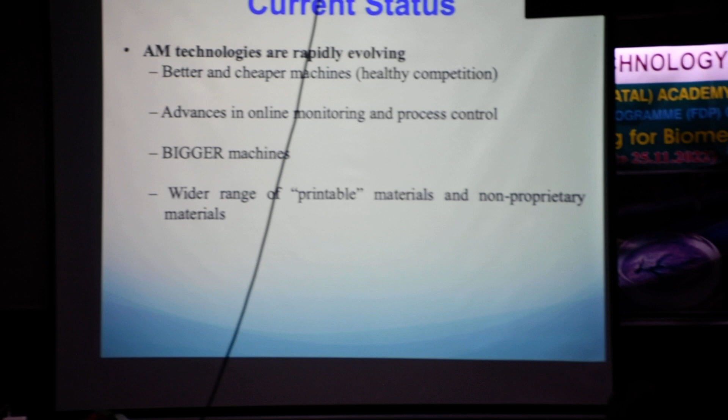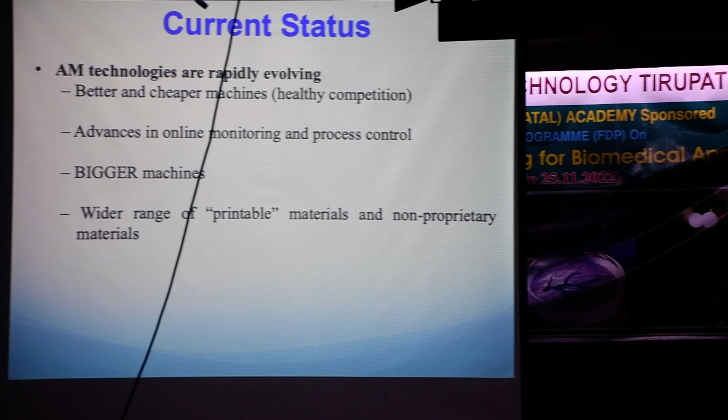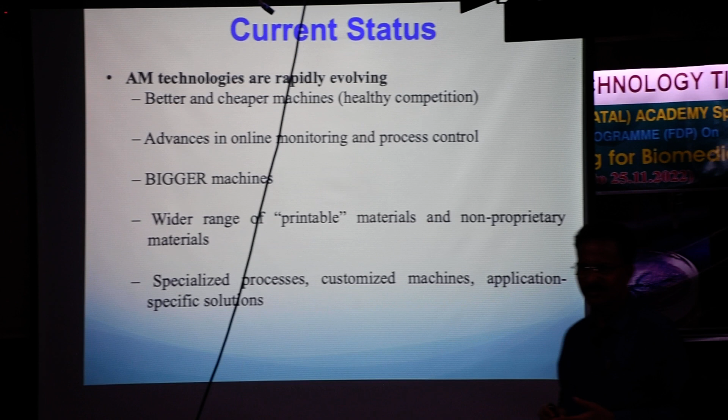Wide range of printable materials and non-proprietary materials, that is what I was talking about. The material should not be proprietary. You should have multiple sources to source the materials so that you will get the material at a cheaper rate, of course maintaining the quality. So printable materials also, wide range of materials you should be able to print. If your technology says I can only print plastics, it has limitations. Your technology should be able to print metals, plastics, ceramics, even biomaterial, that is what your workshop is. Biomaterials, biocompatible materials, this piece.

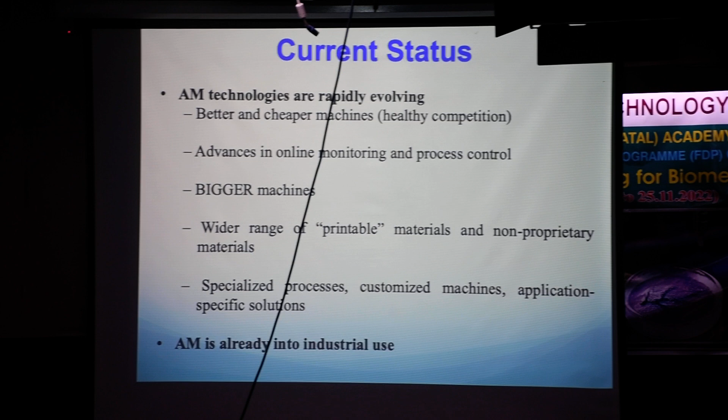So the specialized processes, customized machines, application specific solutions, these are all part of the current status of additive manufacturing. Additive manufacturing is no more a rapid prototyping technique, it has gone into the industry already. People are using it now in the industry to some limited extent, not for everything.

So unique benefits or capabilities of 3D printing, we can list as follows. It is very rapid, in few hours an idea can be realized and converted into physical reality. What you see is what you build, even what you don't see, what you conceptualize in the mind, you will be able to produce it. There is no limitation as such.

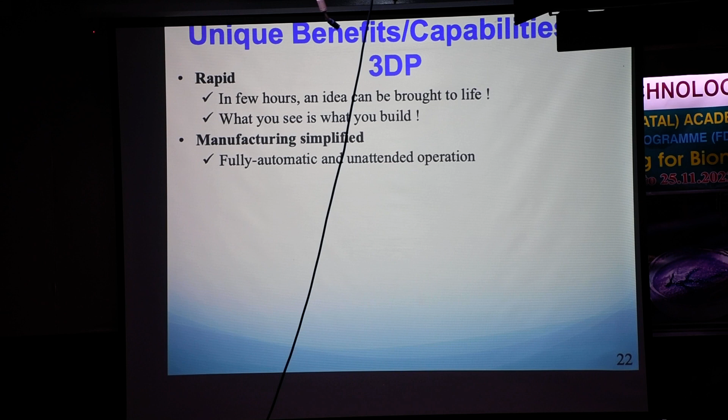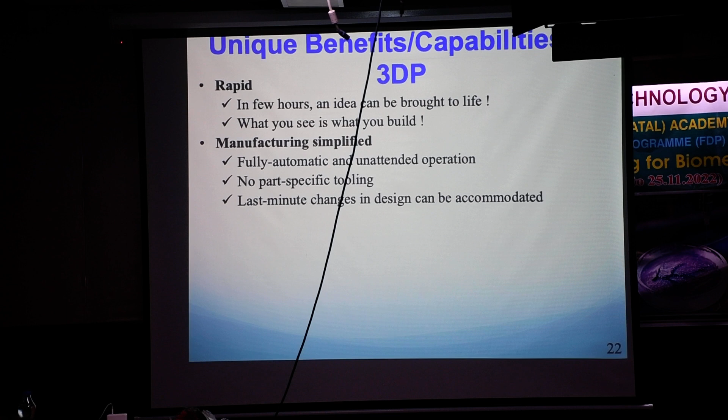Manufacturing simplified: fully automated and unattended operations. Operator need not be there, he can just switch on the machine, load the material, switch it on. Come tomorrow morning, the component will be ready. No part specific tooling, any component, same machine you can use. Last minute changes very easily can be accommodated.

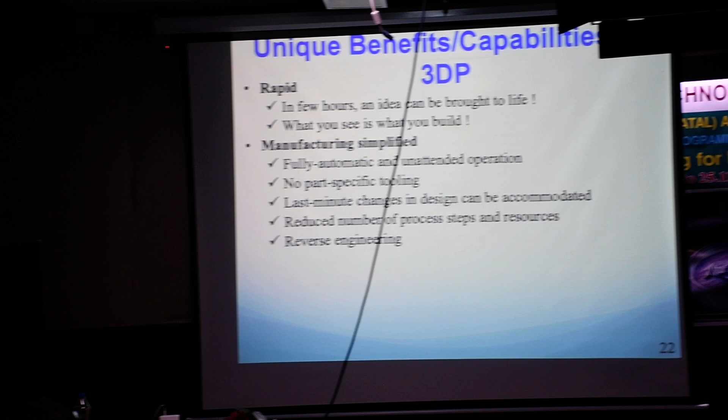Reduced number of process steps and resources. There are only three things: build the solid model, slice it, and then print it. That's all, 3 steps. Reverse engineering is also very much possible.

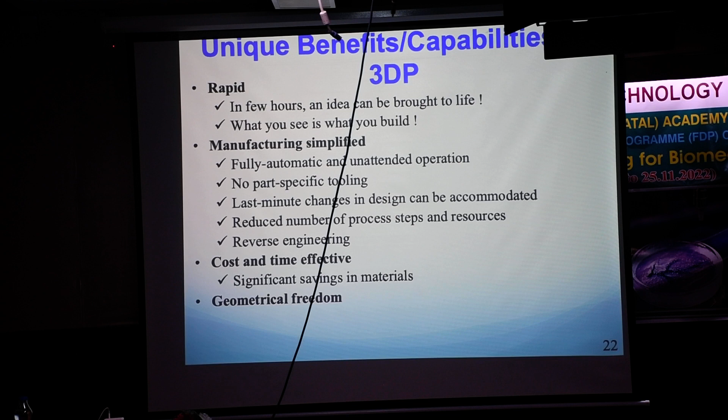Cost effective and time effective. Significant savings in the materials, because material wastage is very minimal in this case. Support material is what you are going to take out, otherwise you will be depositing whatever is necessary to realize the component.

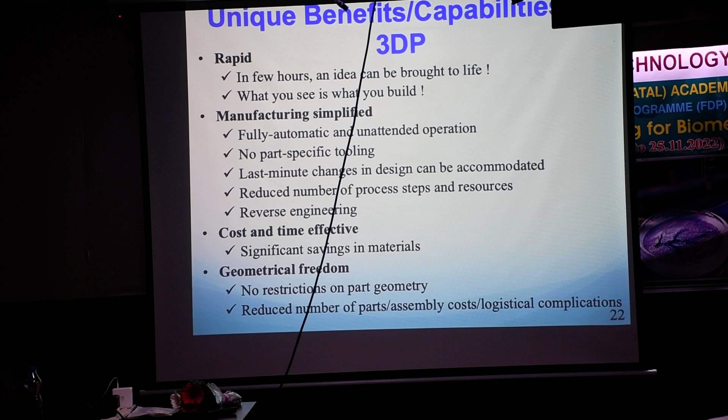Geometrical freedom, you have no restriction on the part geometry. In fact we say in 3D printing the part complexity is free. You don't have to worry about the complexity in the 3D printing process.

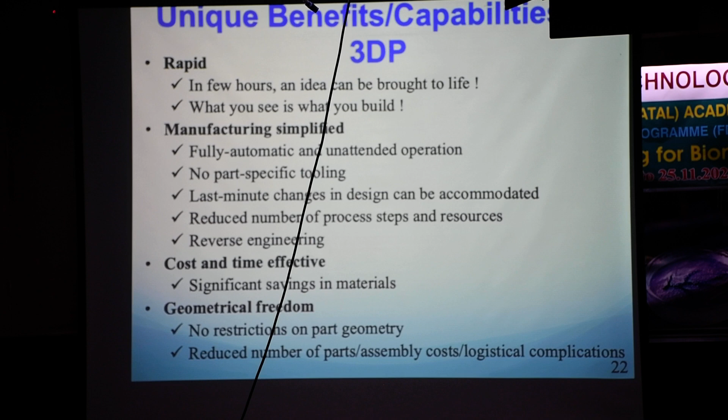Reduce the number of parts, assembly costs, and logistical complications. In fact you have a product in which various components will be having relative motion. In the conventional scenario, how will you think of it? Fabrication, you produce different components, bring them together, assemble them, and realize the product. In 3D printing you can build the entire thing, all the components with relative motion in one go. No assembly required, that is the beauty of this particular technology.

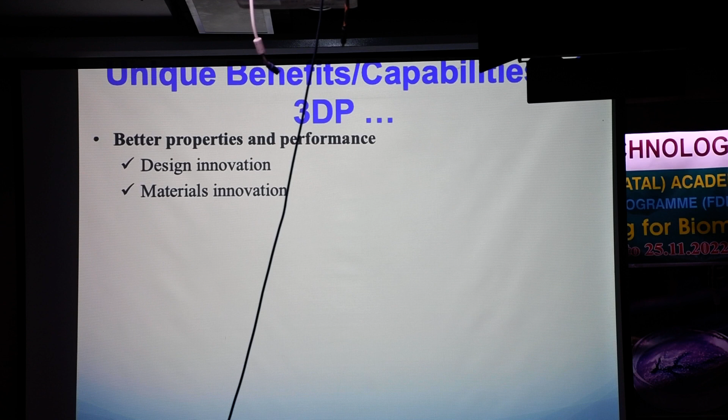So the better properties and performance you can achieve with the components. Design innovation: you can design how much material is required in this particular section of the component, what sort of design changes are required. All those things you can do as far as design is concerned.

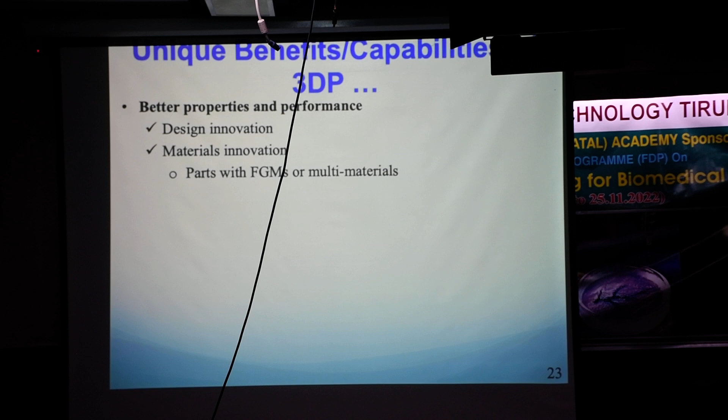As far as materials innovation is concerned, you can produce parts with functionally graded materials or multi-materials. A single component may have different materials at different locations, multi-material. Or you can have material A at 100% here, material B at 100% here, and material B slowly diminishing while material A slowly increases like this. So you may achieve this kind of gradients. If you feel some property is required at this end, you use a corresponding material with a different property altogether.

For example, in the case of an aircraft body: inside you have some conditions, outside you have altogether extreme or very harsh conditions, especially in the case of rocket materials. Outside the material will be experiencing a lot of temperature, friction, all those things. Inside its conditions are different. So from outside to inside you need to have that gradient. Such things we call functionally graded materials.

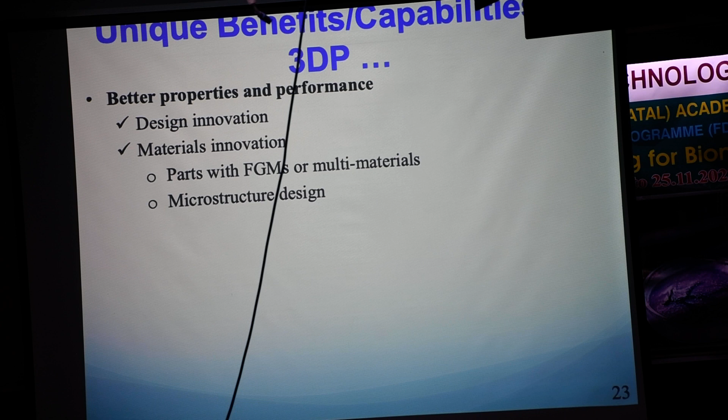Microstructural design: not only just using the material, but what kind of microstructure is required at which region. So you can design the microstructure also to that extent, that is possible.

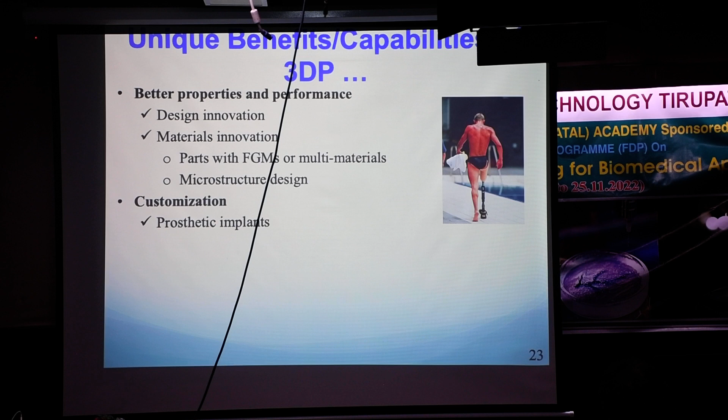Customization, because when we talk about body parts, different people will have different dimensions. For example, the knee joint has different dimensions and slight geometric variations. So you can produce prosthetic implants suited to a particular patient.

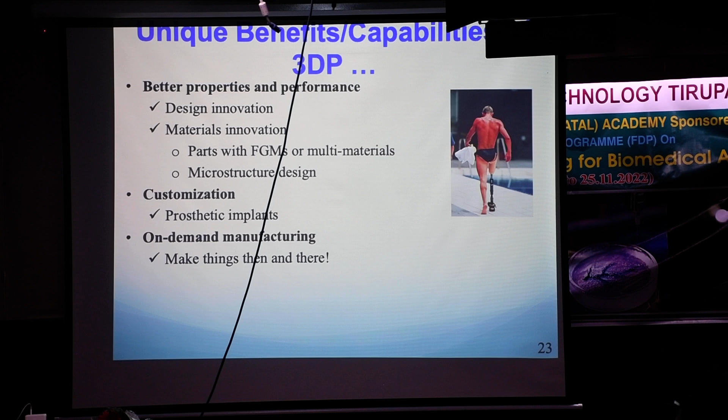Next, on-demand manufacturing, making things then and there. For example, when the Mars Rover 2020 was launched and sent, a 3D printer was part of it, because if something goes wrong, the 3D printer has to manufacture and use a part, since nobody is there on Mars. So your 3D printer helps in manufacturing or repairing a particular component.

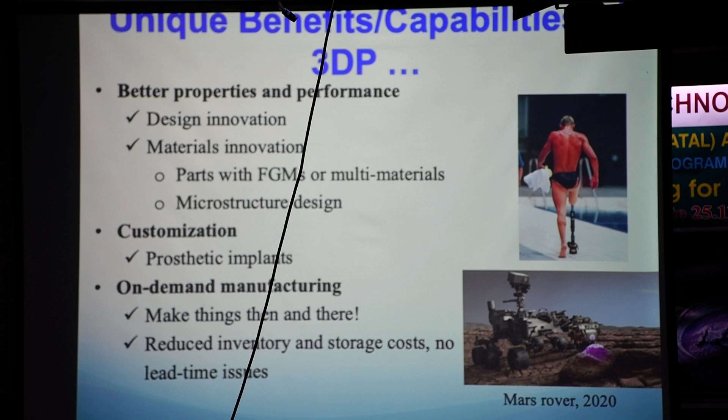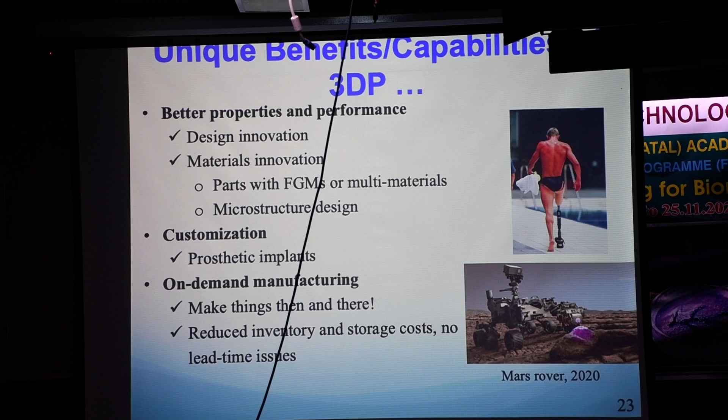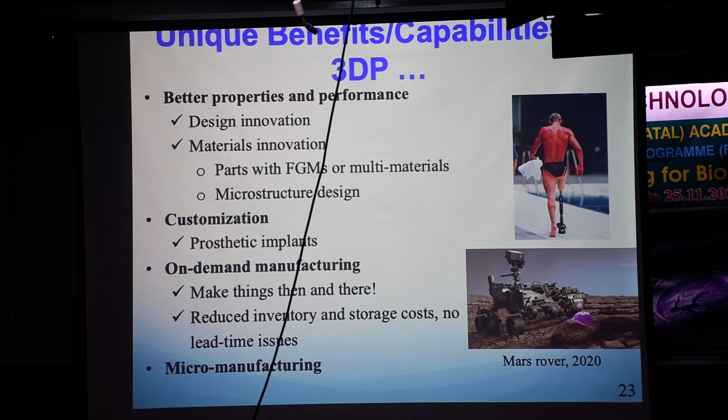You can see the exciting applications of 3D printing, including reduced inventory and storage costs, and no lead time issues, because you don't have to maintain too many components in inventory thinking the supplier may not supply next month. When you buy more, you have to maintain them, since every spare part has its own shelf life. So you need warehousing, and deal with pilferage and material spoilage. But here, whenever you want, you just produce at that time, without maintaining too much inventory.

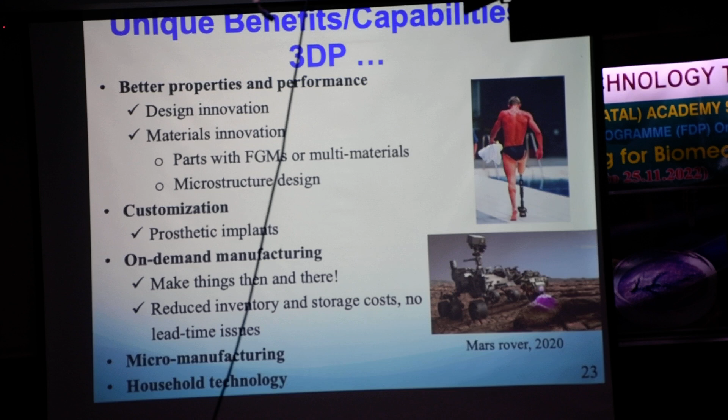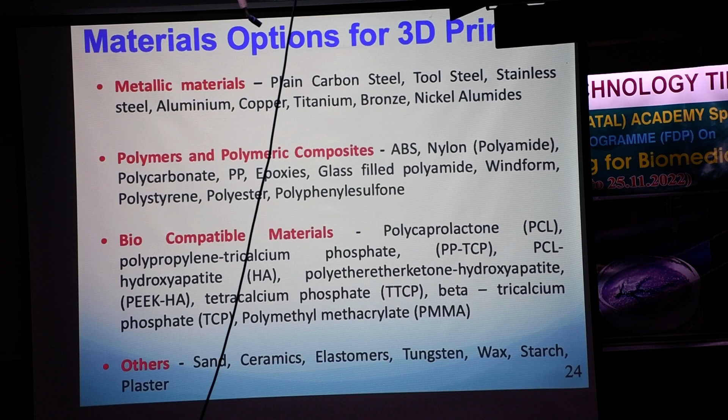So micro manufacturing supports household technology. You can manufacture different household items using a 3D printer. Next, material options: you have metallic materials, polymers, biocompatible materials, and other materials like ceramics and elastomers. So you have a wide range of materials which are possible.

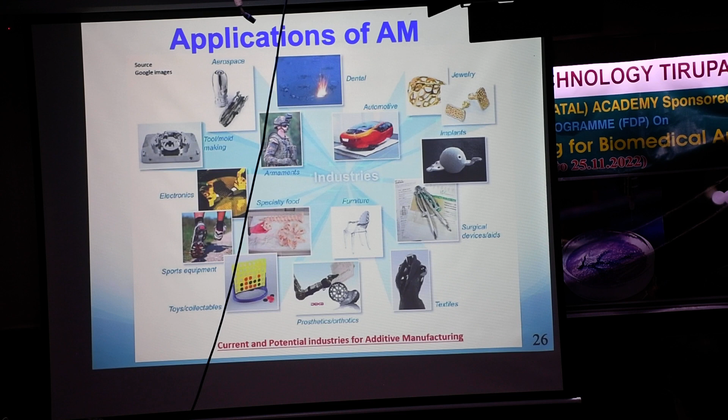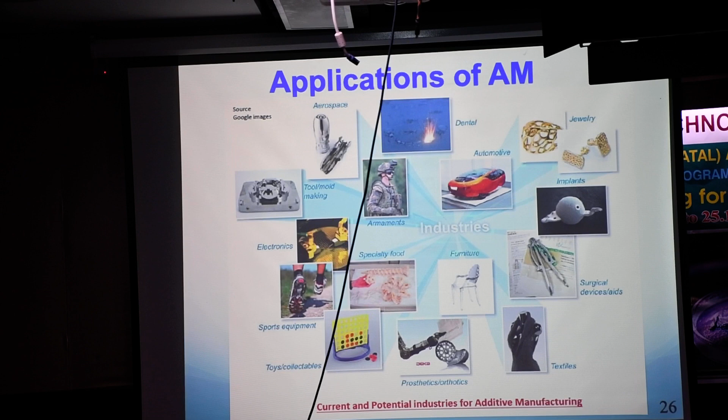Now coming to the applications of 3D printing, you can see the spectrum of applications that 3D printing technologies have got, across almost all sectors you can use this particular technology.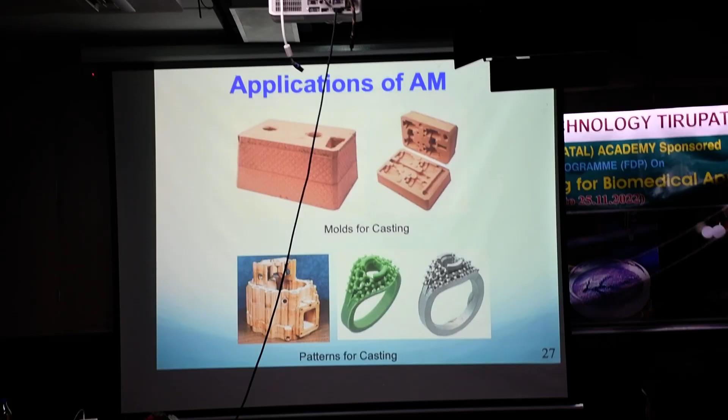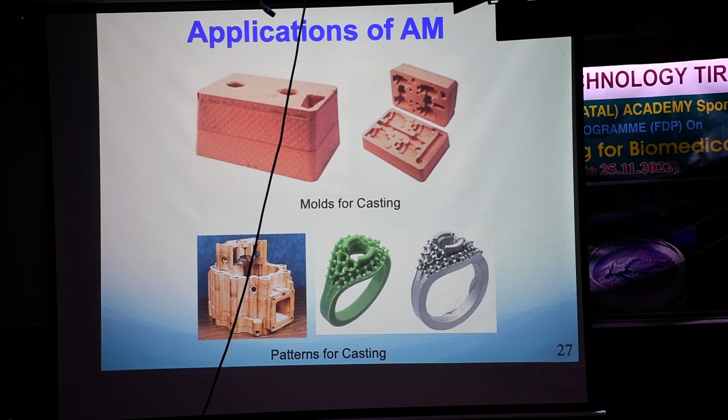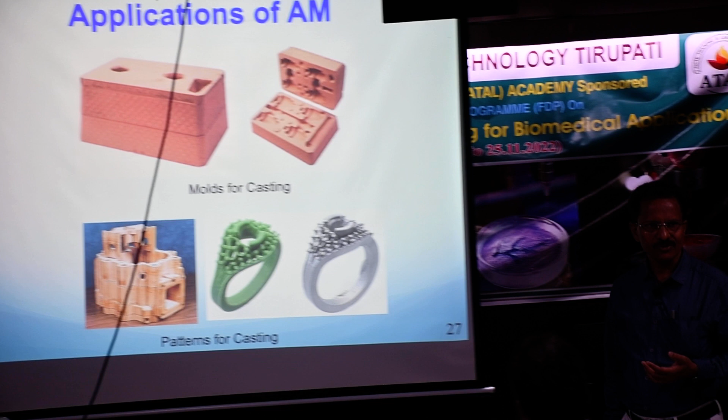So these are ornamental objects. We don't produce the ornaments themselves using 3D printing; we produce the dies. Once the die is ready, you can produce any number of components, and for a different component, another die can easily be produced. These ornamental components have such shape complexity that it's very difficult to produce the dies using conventional manufacturing processes. You can see the complexity in jewelry design.

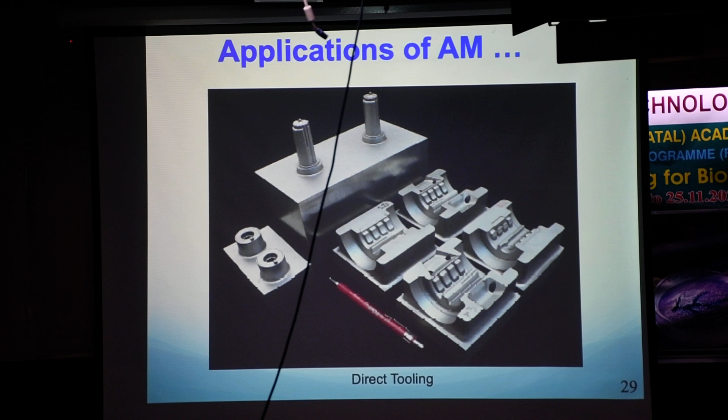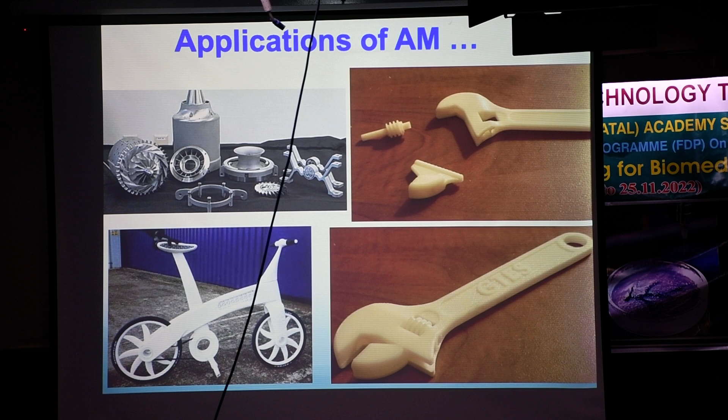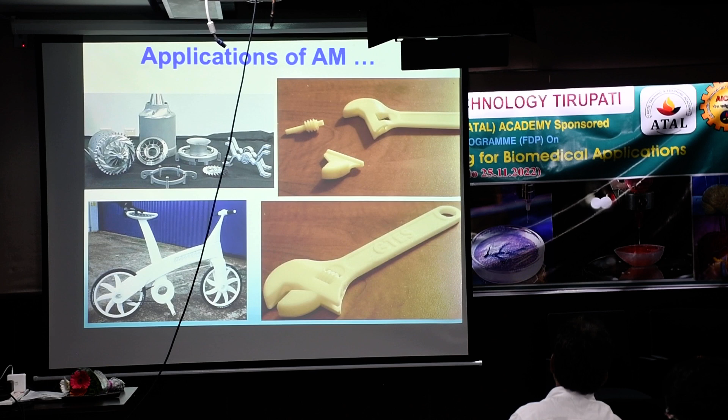Next, direct tooling. Here's an interesting example: this spanner with adjustable jaws has relative motion between its parts. Conventionally, you'd produce all three parts separately and then assemble them. Using 3D printing, you can produce this entire thing in one go, with no assembly and no separate part manufacturing. Everything is produced in one stretch, while still having the relative motion between the parts.

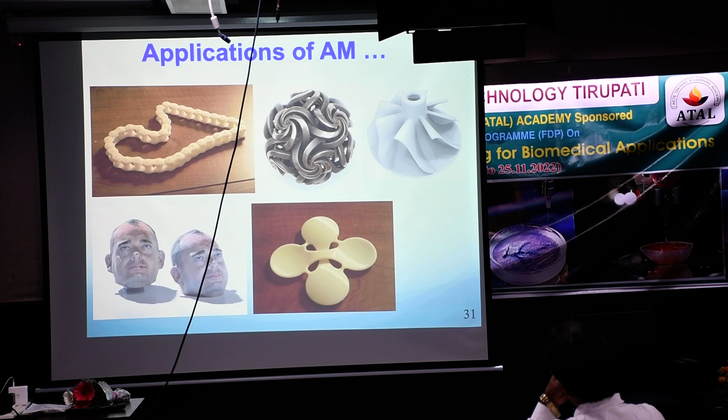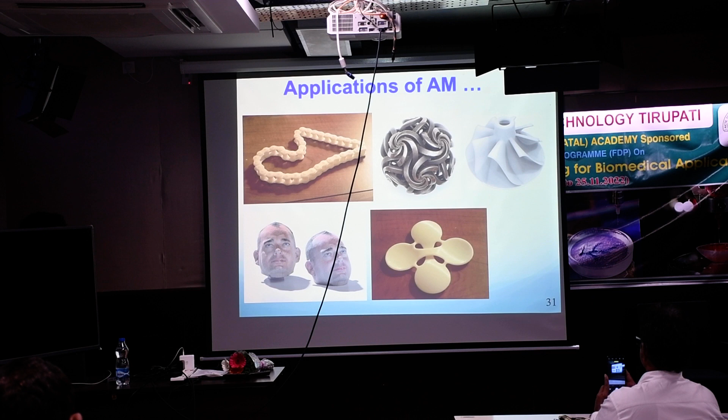You can see the kind of complexity you can't imagine producing using a conventional manufacturing process, even impeller blades. This is what we talked about a little while ago regarding mass customization.

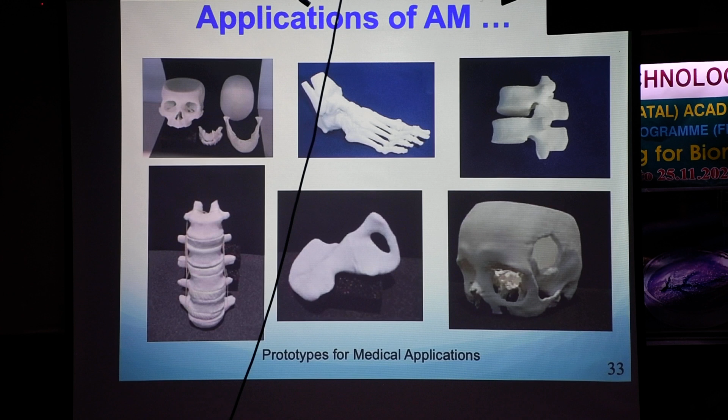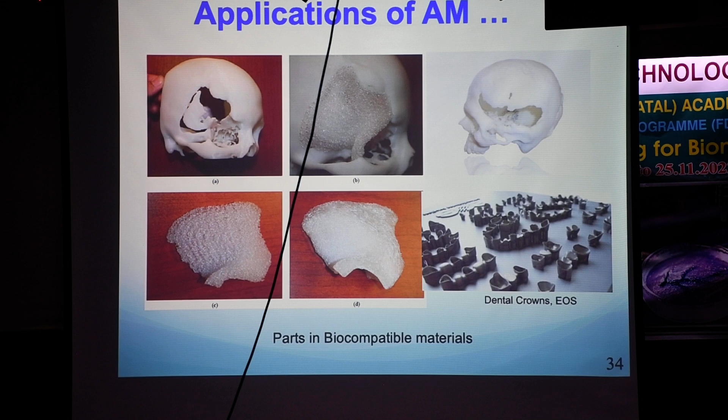So prototypes for medical applications can be produced, not just prototypes but end-use parts also. You can see part of the skull being repaired; when a part of the skull is damaged in an accident, you can repair it. Various things are possible here, such as an artificial heart being manufactured.

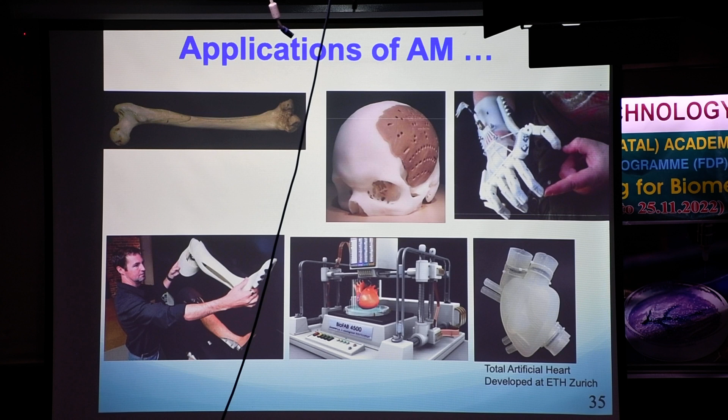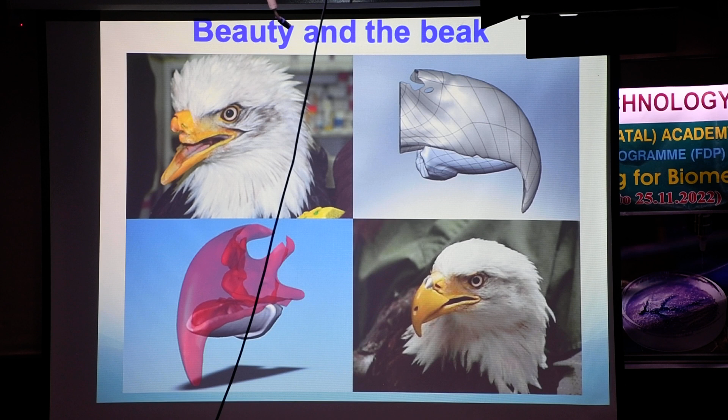Next, see this bird that lost a beak. It has been repaired and the new beak was attached to the bird.

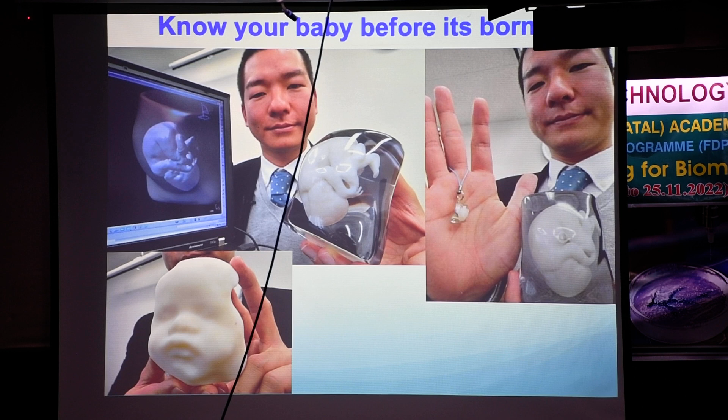Of course, this is a crazy guy. He wanted his baby, which is still in the womb, to be used as a keychain. That's a crazy thing.

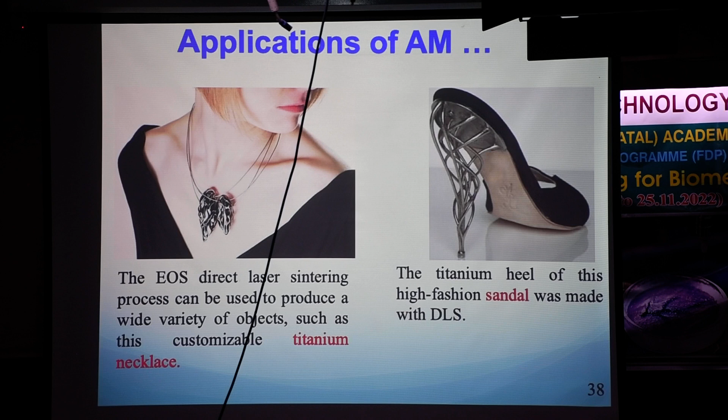So, ornaments, and then you have sandals made using the 3D printer.

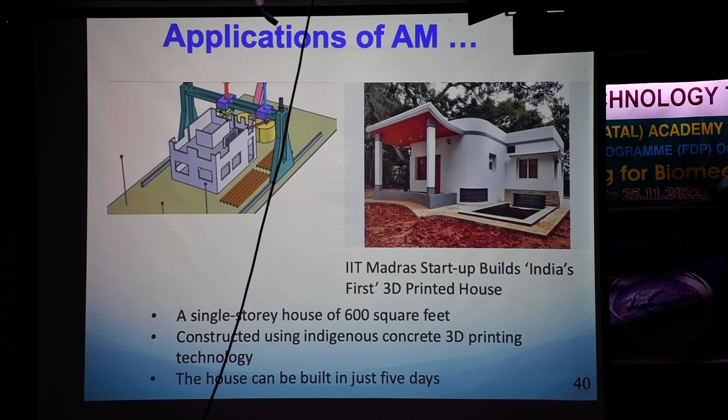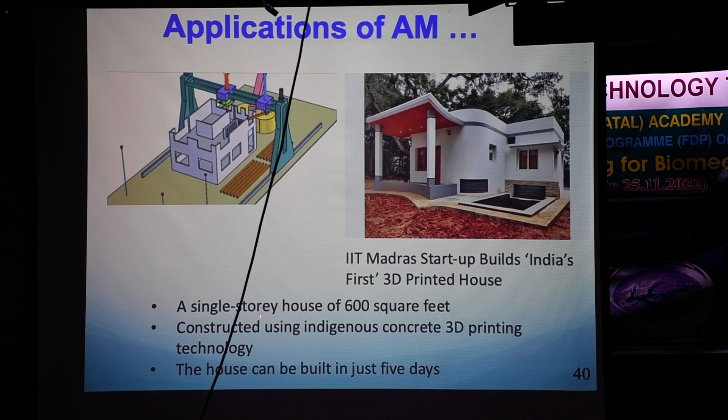You can see here, IIT Madras - you might have seen this in the news. This was built at IIT Madras by a startup company. One of the persons involved in this has joined our college also as a faculty some time back, so he is working here. A single story house of 600 square feet was constructed. It is there in the IIT Madras Research Park. When you happen to go there, you can also see that.

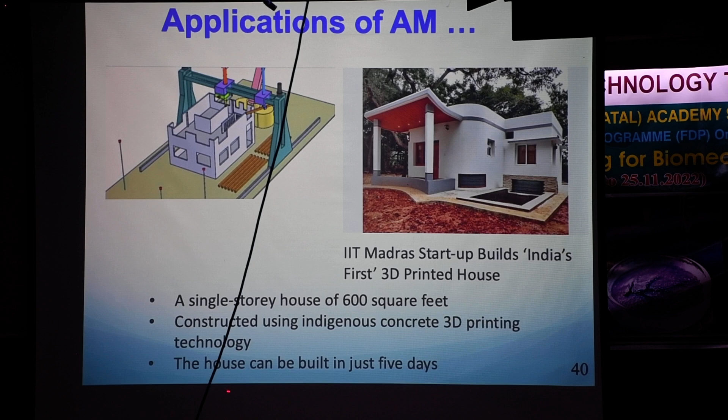It was constructed using indigenous concrete 3D printing technology. The house can be built in just 5 days. In future this may be very interesting - you go on a vacation or a leave for some 4 or 5 days, and when you come back, there is a house just behind or beside your house which has come up in just 4 or 5 days. Very strange - the material is concrete.

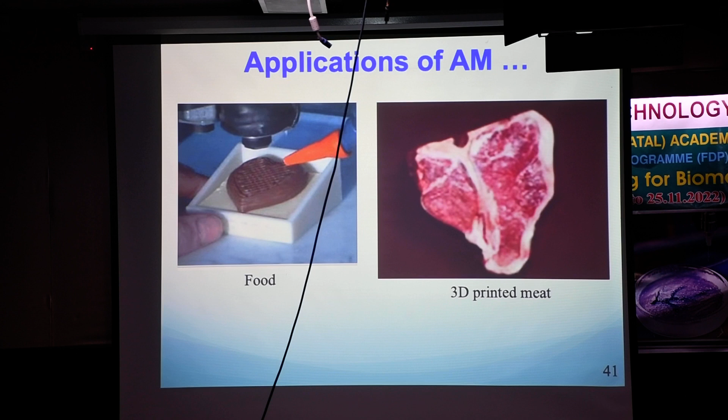Next, you can have food manufacturing also using the 3D printer, even 3D printed meat. If you are an animal lover, if you are a non-violent believer, you can produce the meat without killing the animal. That is also possible - we call it cell culture.

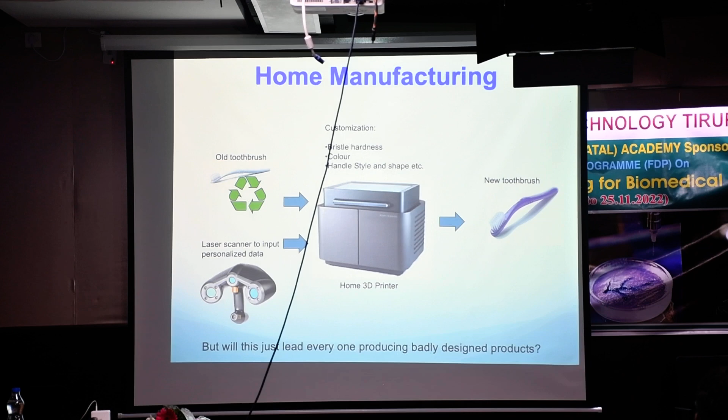Next, you can print your own toothbrush of whatever design you want, depending upon the structure of the teeth, all that. So for household applications, reverse engineering is very much possible with 3D printing.

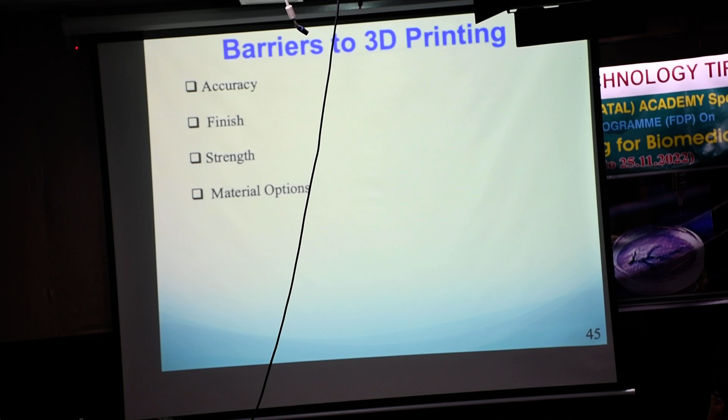Having given the rosy picture of 3D printing, we also have the other side of it. There are barriers or challenges associated with 3D printing - mainly accuracy issues, finish, strength, material options. These are some of the fronts.

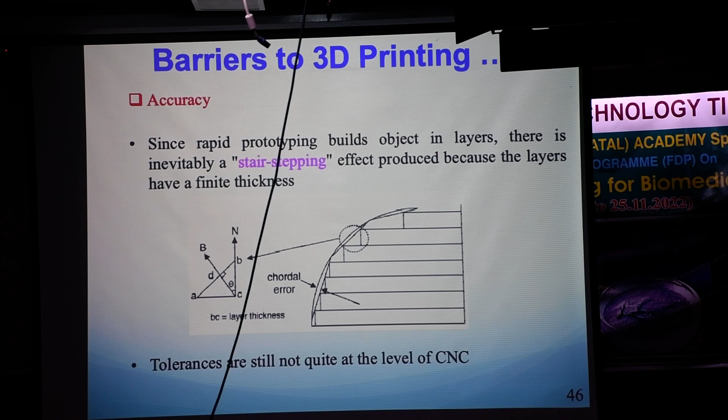For accuracy, as you know, the part is built layer by layer, so obviously you will have this staircase effect on the components, unless you post process it. As such, there will be some staircasing effect, and that is going to cause accuracy issues.

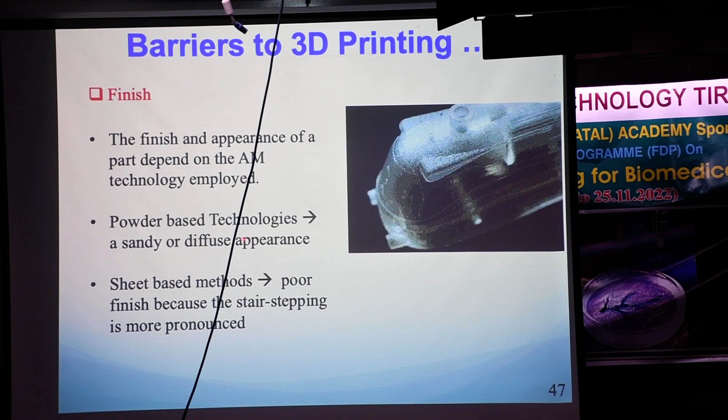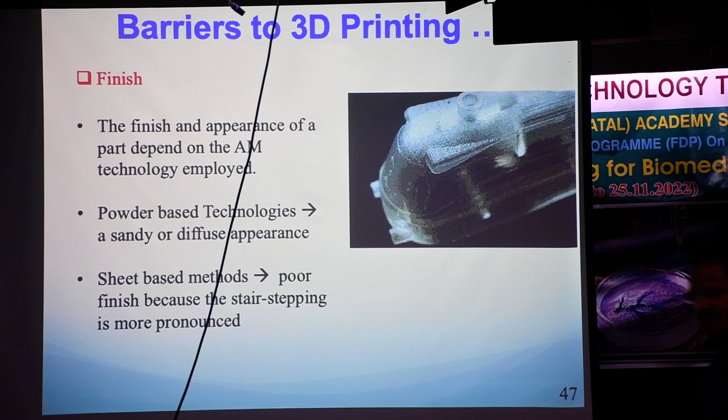The finish, especially when you are using powder-based technologies, and also sheet-based technologies like laminated object manufacturing - in such processes, the surface finish is not so good. Your CNC machining process will be able to give you very good surface finish compared to 3D printing. So the component has to undergo post processing in order to give the desired surface finish.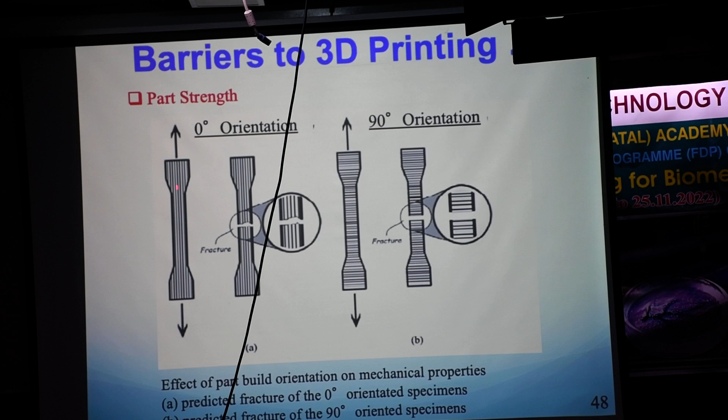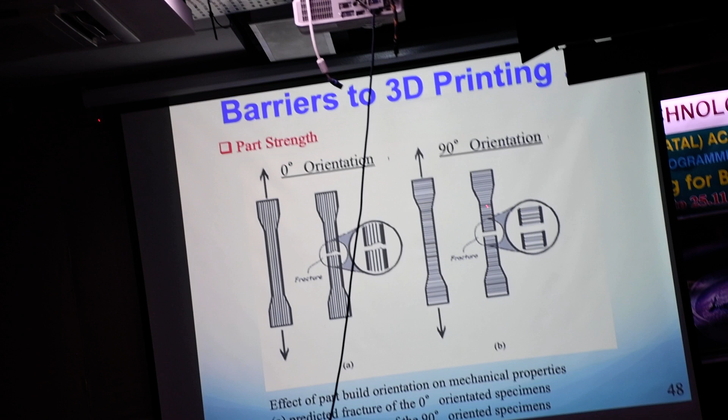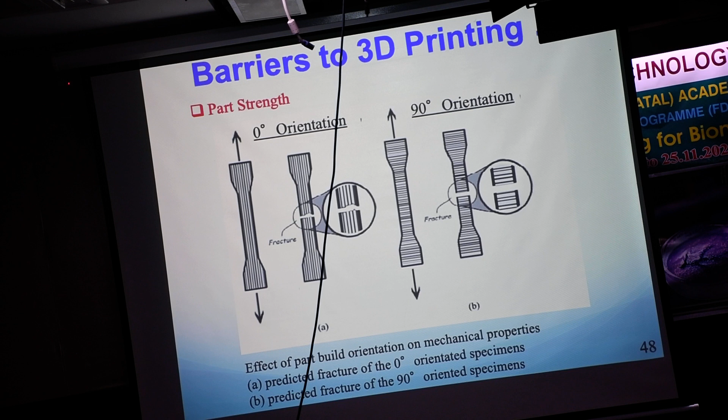When it comes to strength requirements, this component is built layer by layer in this fashion. When you load the component in this direction, it will have very good strength. But when the component is built in this direction and you load in that direction, the strength between the layers is not so good, so it may get separated. So depending on which direction you are going to load, you have to choose the build direction to overcome this difficulty.

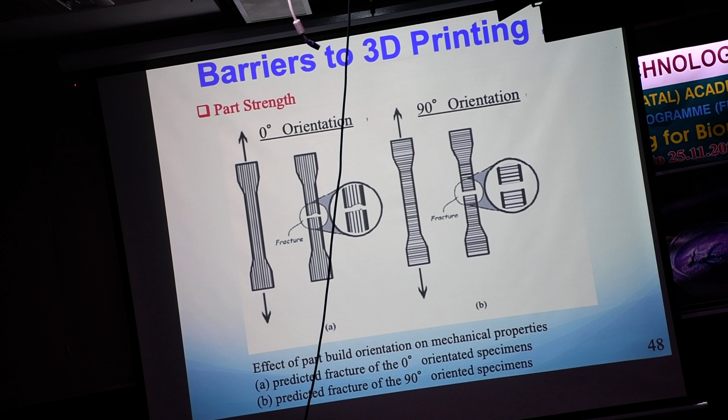Secondary operations are very much needed. Post curing is required in the case of stereolithography - that is one of the technologies.

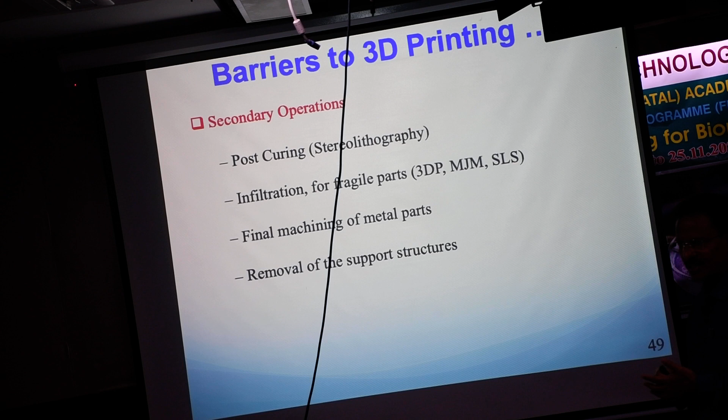Infiltration is needed for fragile components. Infiltration means the components made using 3D printing will be a little porous, so the density will not be so good. You just leave the component in a liquid bath of some metal, so that the liquid metal will get into those pores and increase the density. That is called infiltration.

Of course, final machining of the metal parts and also removal of the support structures all fall under the post-processing activities.

You can see here, this white material is the support material that is being removed. There are different techniques for removing the support material - you can remove it manually, or you can leave that particular part in a liquid bath so that the liquid will melt the support material without affecting the build material. Just leave it there for some time, and the support material will come out, getting melted, leaving the component unaffected. So there are different techniques.

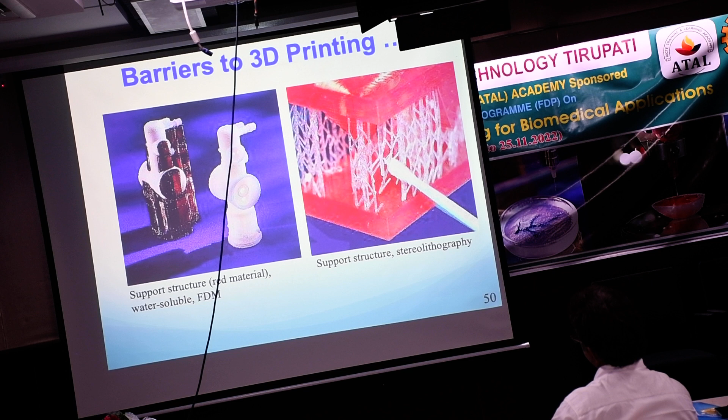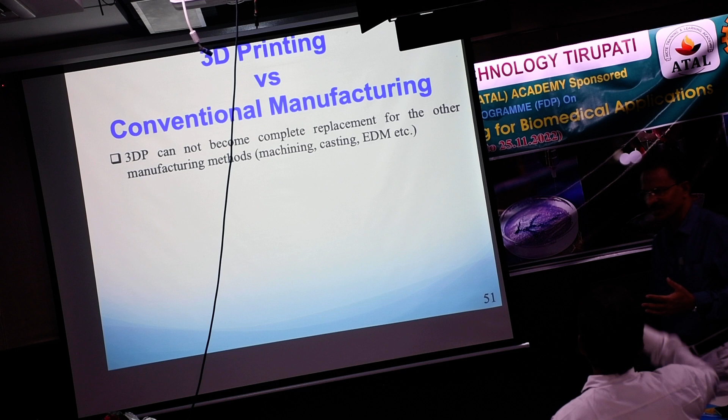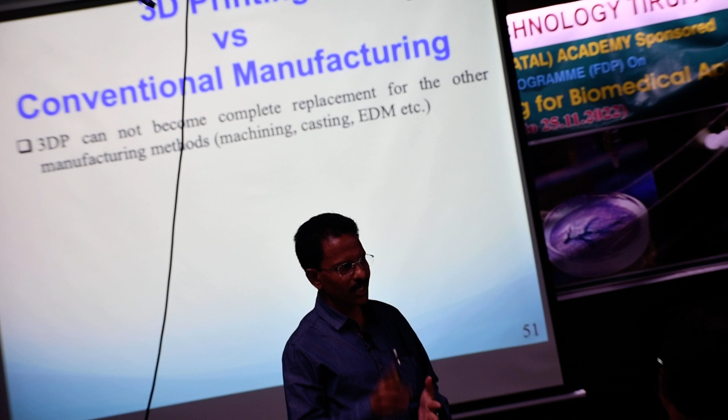So, 3D printing versus conventional manufacturing - 3D printing cannot become a complete replacement. That has to be kept in mind. Even though we spoke a lot about 3D printing, I don't say 3D printing will be able to replace the conventional manufacturing processes. It is not going to happen. You will still have conventional manufacturing processes because they are good in certain conditions.

When complexity is very high, then you will think of 3D printing. For a simple component, go for conventional machining process or casting process. A very large bed has to be made - you can't make that bed using a 3D printer.

Okay, it is going to take a lot of time, resources. It will become eventually costly. Okay, instead your casting process will be able to give you a cheaper component.

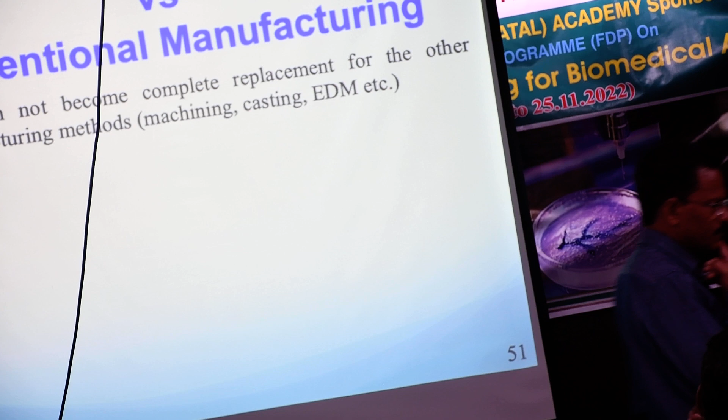So you have to weigh these advantages and disadvantages, and then choose. The final thing is judgment or decision making. Which manufacturing process should I use for this situation? So when you have the knowledge of all these processes or technologies, you will be able to make the right decision. Otherwise, you will just select something which may be counterproductive.

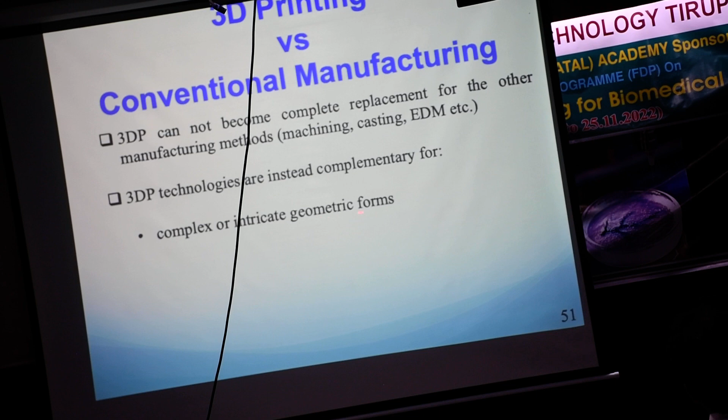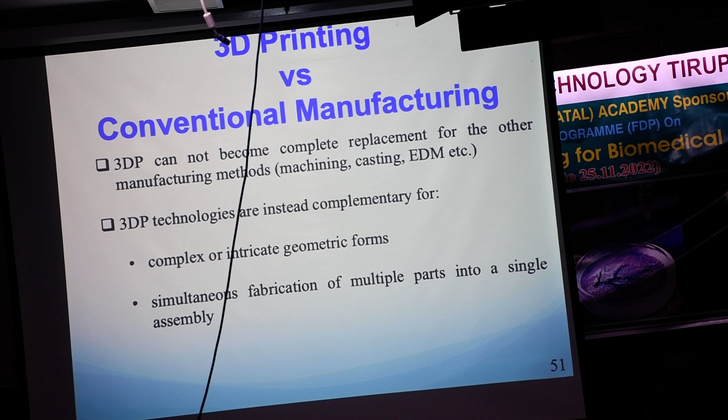So the 3D printing technologies are instead complementary to conventional manufacturing processes. Complex or intricate geometric forms, whenever you encounter simultaneous fabrication of multiple parts into a single assembly without producing separate components and assembly, simultaneously you can manufacture that. Multiple materials or composite materials in the same part, that is where you can think of 3D printing.